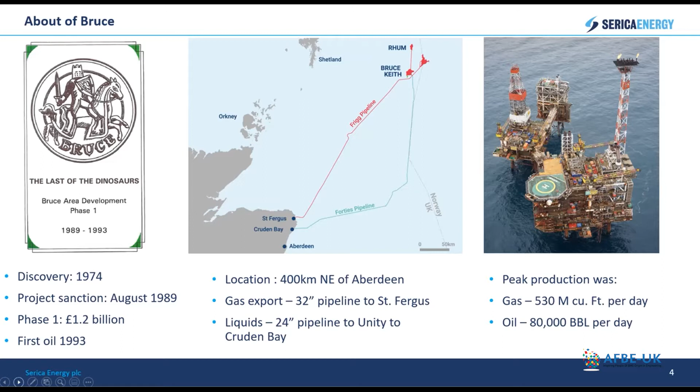You can see the drilling derrick towering there in the middle, and this is where well intervention is located. The CR, this is the compression platform. This was like phase 2 and came along later. This is the arrival point for the Rhum gas and the booster compression for Bruce gas. There is secondary helicopter access here for emergency use.

A couple of notes here. The PUQ jacket is in 121 meters of depth, and when it was lifted in place at the time, it was a world record for the heaviest jacket lift, which was 9,360 tons. The flare, you can see towering there as well. That was the world's highest at the time, which is 80 meters high.

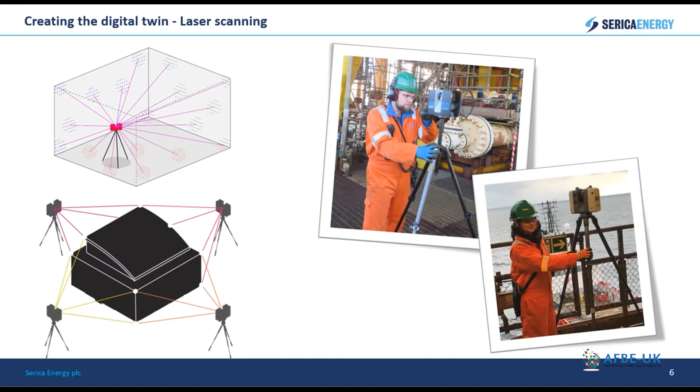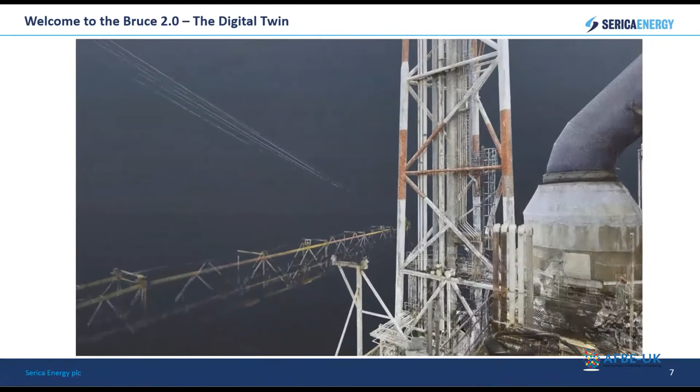So this is how it was done. We sent the company off, GDI offshore, to scan the asset with our laser scanning, and this is a fly through of the PUQ asset of the model when it's all integrated together. So this is landing on the heli deck. The PUQ is the largest of the 3 platforms of Bruce.

The process works by rapidly scanning an environment from a fixed location and then capturing all the minute detail from all the surfaces and the surrounding objects. This is all collected and images taken, and then it forms this 3D model that you see. It took around 40 days to scan the facility in full by one person, and they had about 6,000 different separate scan locations, and it took about 190 billion points of data.

So it looks good, but so yeah. So what do we do with it? You can see the 3 digital scans of the 3 jackets there, but the case for this digital twin was so we could have a tool that could be used every day by both onshore and offshore teams to aid communication. It was to encourage different ways of working, enhance our onshore planning capability, and also to reduce the need for site visits, for surveys, for example. And we wanted a different approach for visual inspection, with the aim of increasing work efficiency, so we could execute more work offshore, and to support our response to the COVID restrictions.

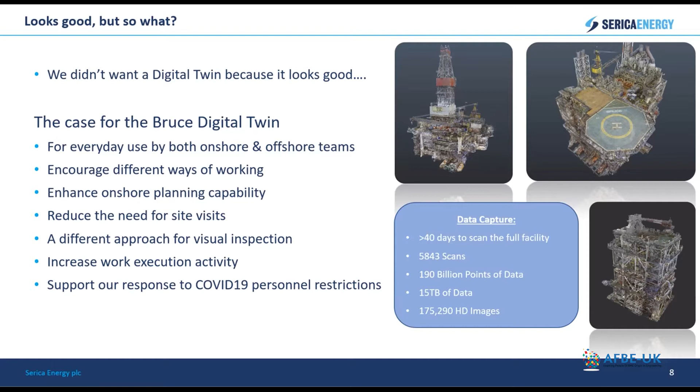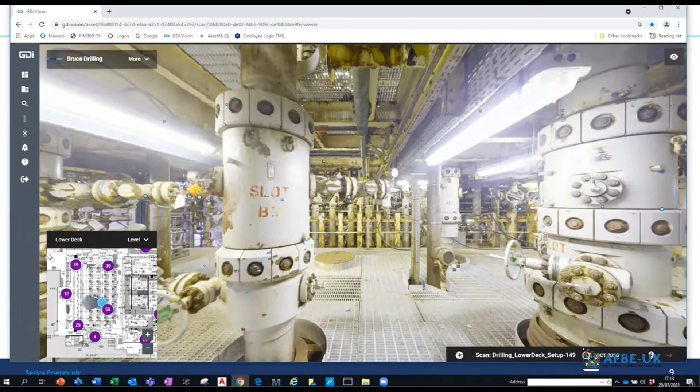Oh, it's taking a bit longer than usual. Okay, so when I go into a certain location, I save the bookmark to save time, and you can walk around and have a look. So these are all the wells, and you can zoom in, zoom out. You can go to these camera icons, and then that'll take you to the next data point.

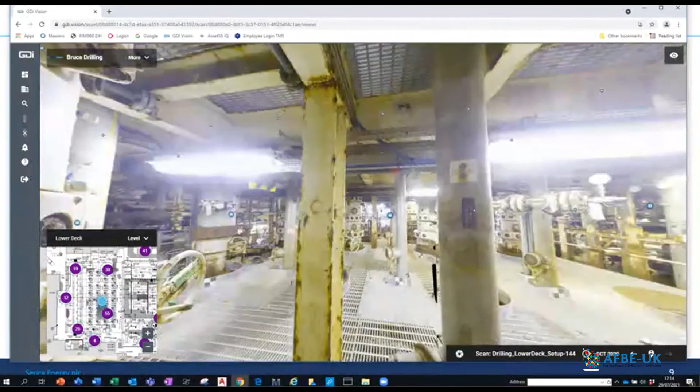Now, I mentioned around there was about 6,000 different data points. This is one of the data points here. This is where the tripod would have been sited and did the scan from. So it lets you move around 360 and just look around like that. You can zoom in quite far, zoom out. It's got the functionality to take measurements, which I'll demonstrate as well.

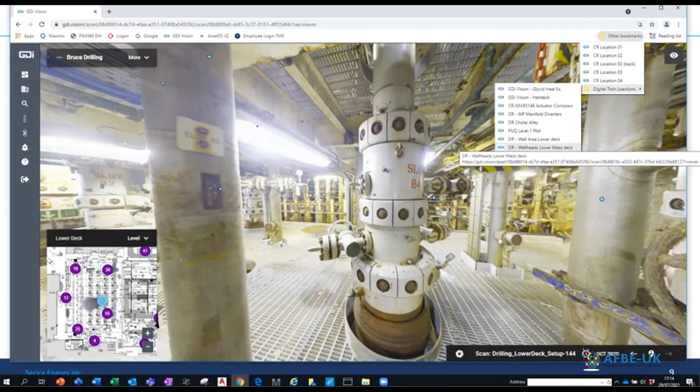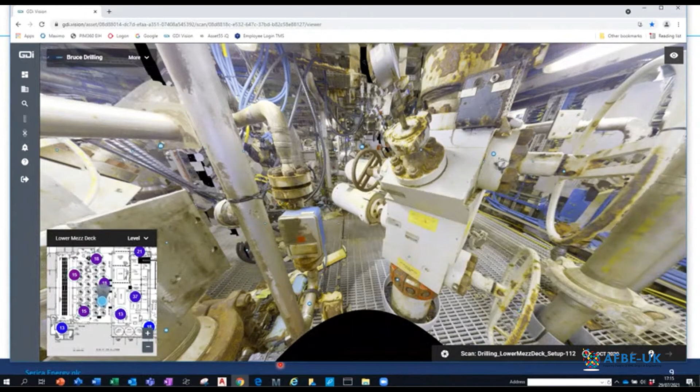Here's another area. So these are all the wellheads. Something that looked like just a little box on the overview I gave you all, it's quite complex - a lot of valves, a lot of pipes. So when somebody who's unfamiliar with the asset or new to oil and gas sees a schematic diagram, it looks fairly straightforward, but in reality it's quite different. That's what I'm trying to get across here.

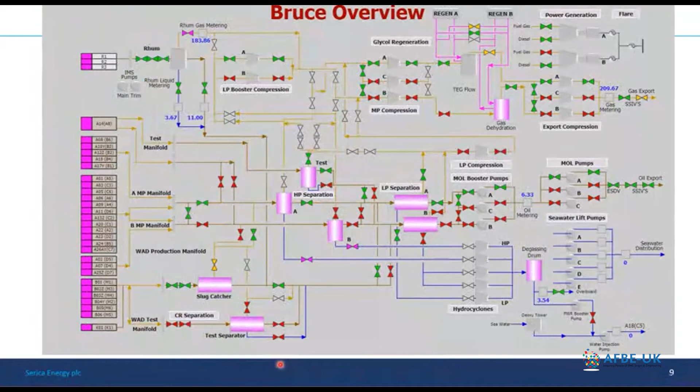The next slide here is just a couple of the points to go to. Helideck - so this is where you would arrive, come off of the chopper.

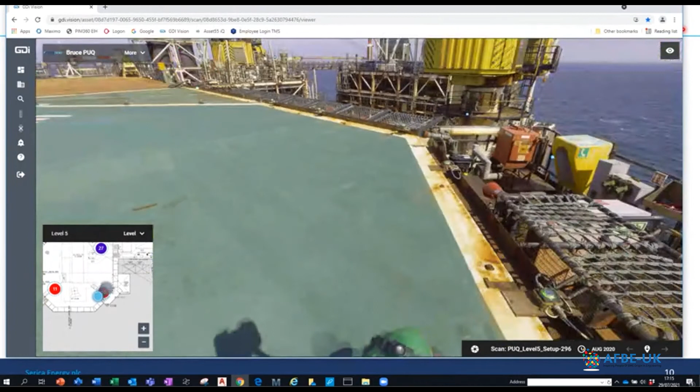And you can see the data point here, the shadow of the scanning tool. So you can go to the plot plan of the asset, pick a point of interest, or you can just use it like you do in Google Street View - just click on an icon, move to the next stage, and walk yourself through the platform. You can do this, just walk around. So that's around about the helideck and manifold area.

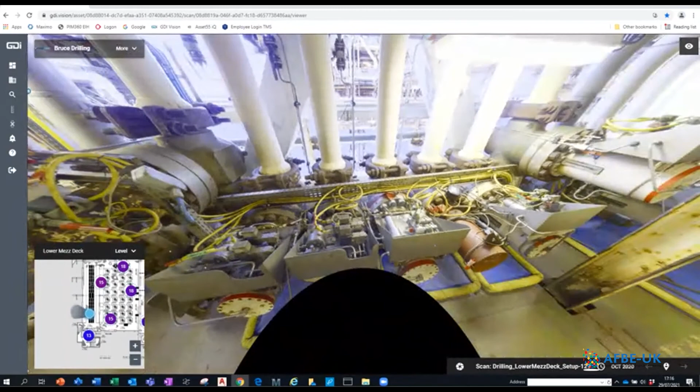So that loads up. Next. Just giving you a little look here - this is the manifold, and these are all the valves that are coming off of it. You can see that there's quite a lot going on.

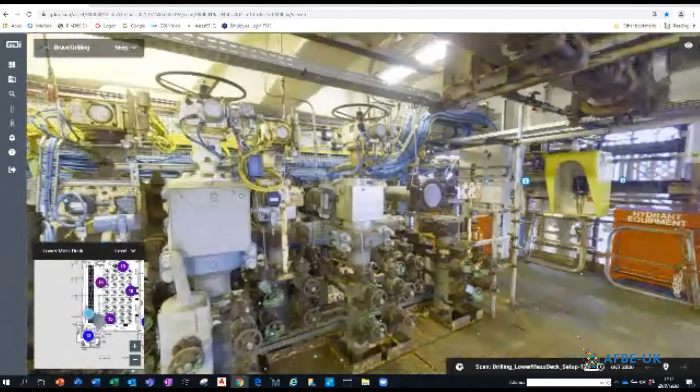These are all the choke valves. These are the valves that control the hydrocarbons when they come out the Christmas tree and reduce the flow rates and pressure down before it goes on to the separation.

One of the most obvious benefits that a dimensionally accurate digital twin brings is the ability to support rapid design and fabrication activities.

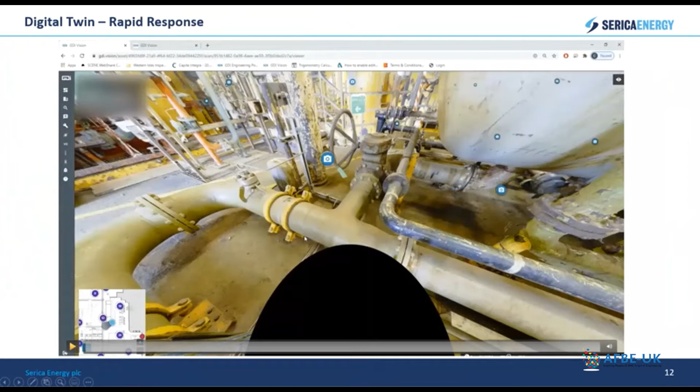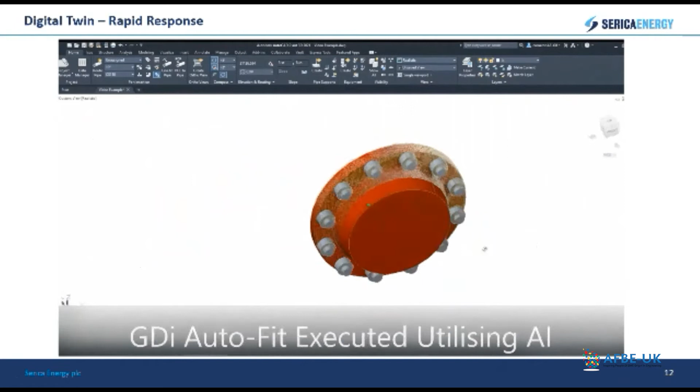So this is going to be a video demonstrating how the digital twin can be used to support a rapid response for replacement of a spool. This is the spool in GDi Vision, similar to what I just showed from my desktop. The point cloud data can be extracted and loaded up into AutoCAD, and they start generating the model. Some of this is through artificial intelligence. There's the flanges.

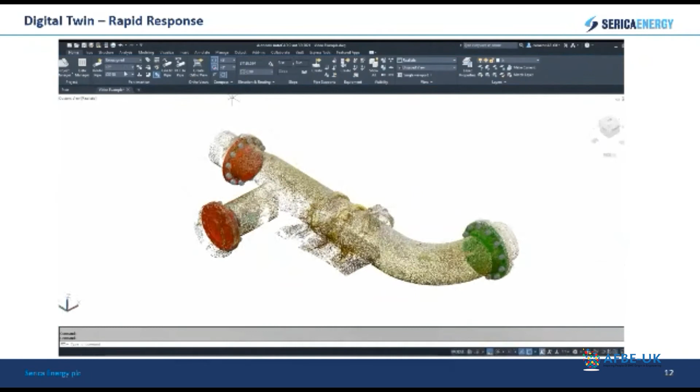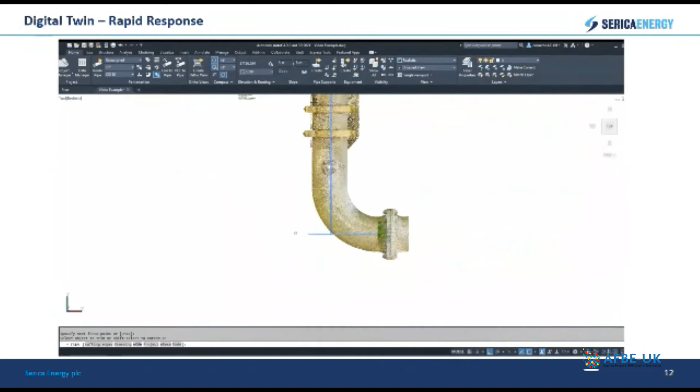Traditionally, if we were to do this, we would have to mobilize personnel and equipment offshore, and need the time to complete a scan, then time to process the data, and then create drawings for this. So with a millimeter accurate model of the asset in place, we can now rapidly respond and produce construction drawings and commence fabrication within hours, not days, in response to any emergent issues.

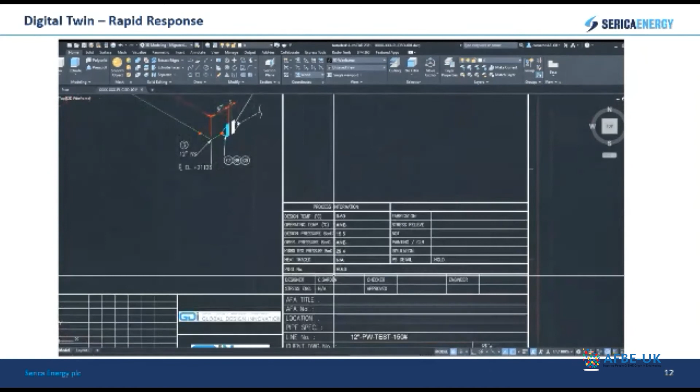It's not just for rapid repairs - the digital twin minimizes or can eliminate the need for surveys for routine repair orders and modifications. From the AutoCAD model, the GDI are able to produce a fabrication drawing, and we can send that to the fabricators to proceed with manufacture.

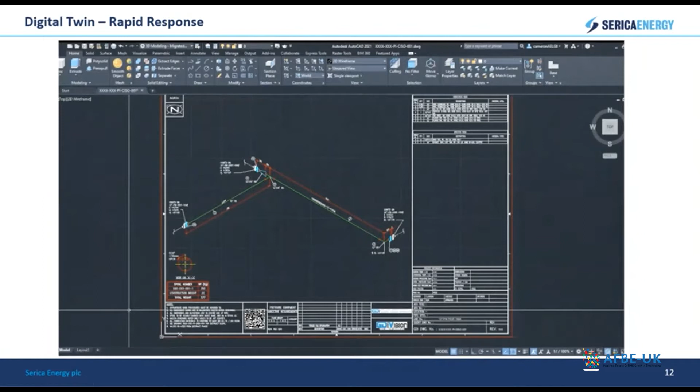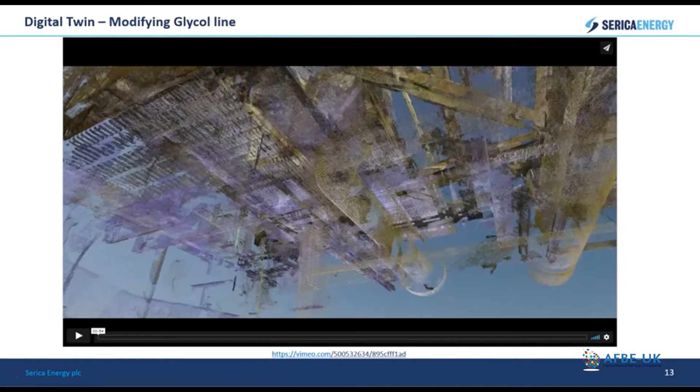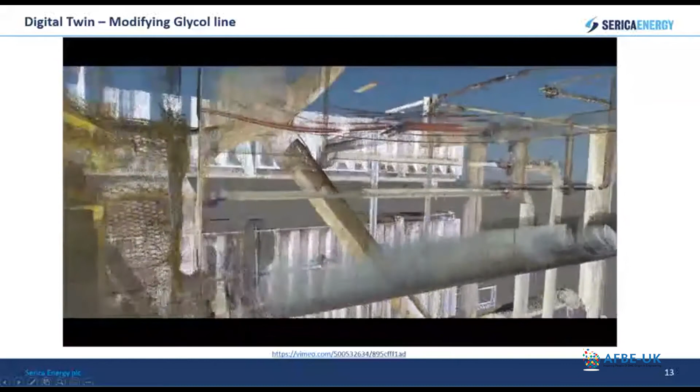So this next video shows how we can use it to understand and help plan complex replacements. This one was for a glycol line, and you'll see how complex this is. The tool has enabled us to plan and design modifications from the beach without the need to go offshore and survey. Just imagine how long this would take to go offshore and survey.

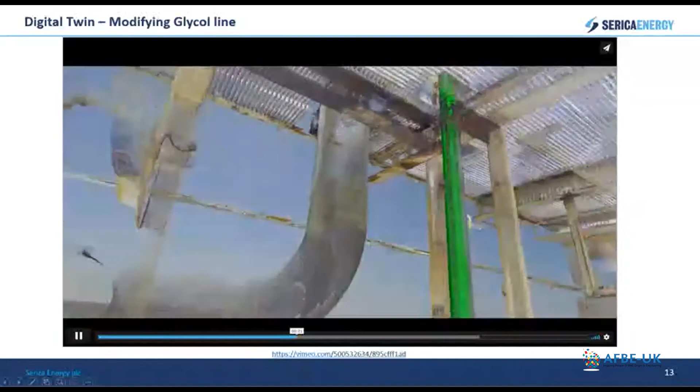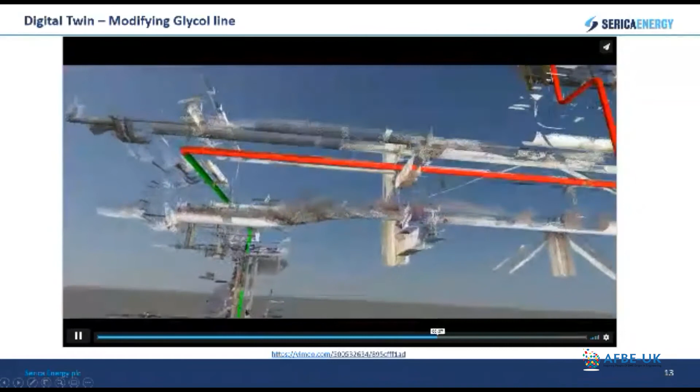So this is the line in question, highlighted in green. It goes down through a deck penetration, down another level, goes round down again - you can see the pipe supports here too, how it's supported. This is made up of numerous bits of pipe, lots of connections there, and there's another deck penetration. To go offshore and survey this would have been quite significant, and we were able to get this model pulled from the digital twin in no time at all.

So this digital twin is allowing a rapid response and modifications. It's allowing us to specify replacement pipework remotely without the need for surveys, or minimising how many surveys we need. It's allowing us to plan modifications from the beach, and it's allowing us to react faster and respond to issues as they arise.

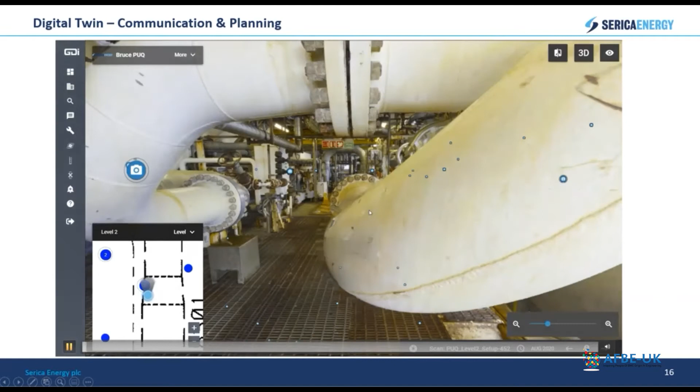So the next couple of slides is around communication and planning. So while this video plays, I will give a talk through.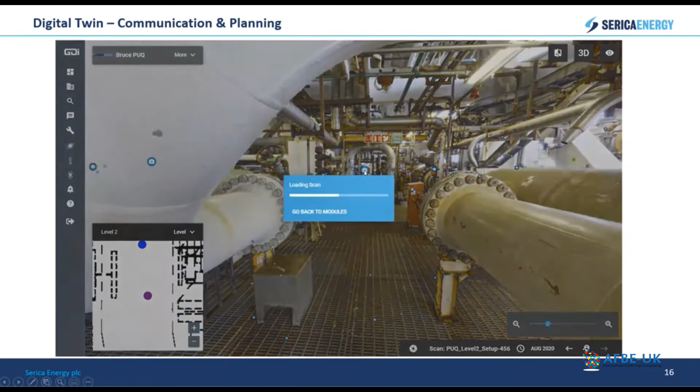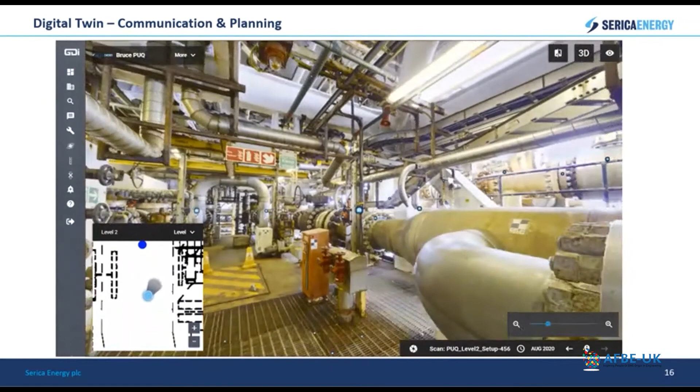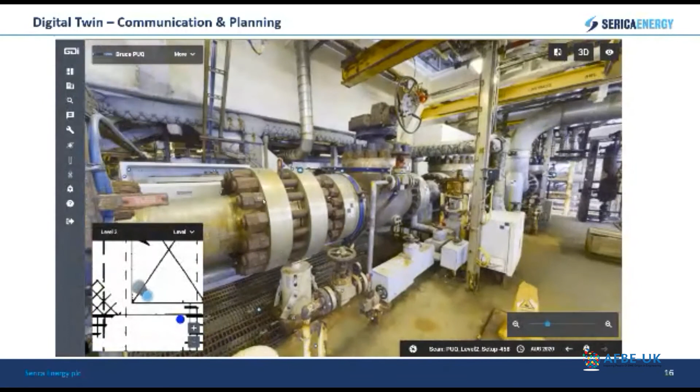It's been quite pleasing how the asset images have captured everything during the 3D survey, and it's become an everyday reference point and communication aid that's been embraced by the offshore and onshore teams. The supporting GDI Vision software allows users to access a scan location and navigate through the facility and points of interest. In its most basic sense, it offers a remote asset familiarization capability for those who have never been on the Bruce asset.

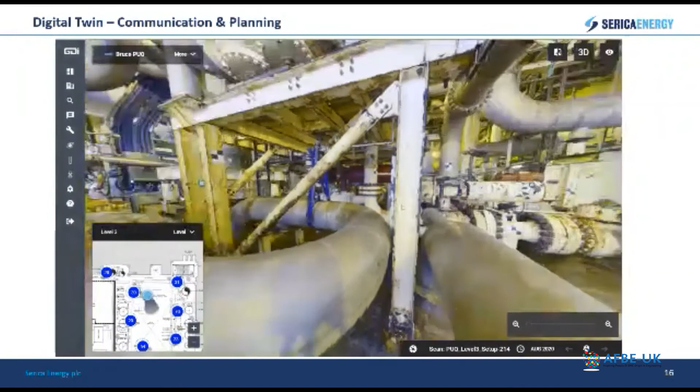So this is really useful for first-time visitors who've never been there, for familiarization.

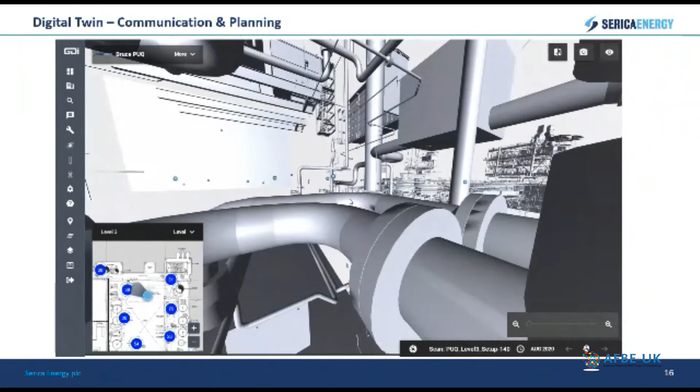And what you're seeing here just now, this is a 3D model, a different database that was produced in the early years of the asset, and this database has been able to be incorporated into the model. So you can integrate other databases into the GDI software, which we're still realizing the benefits of.

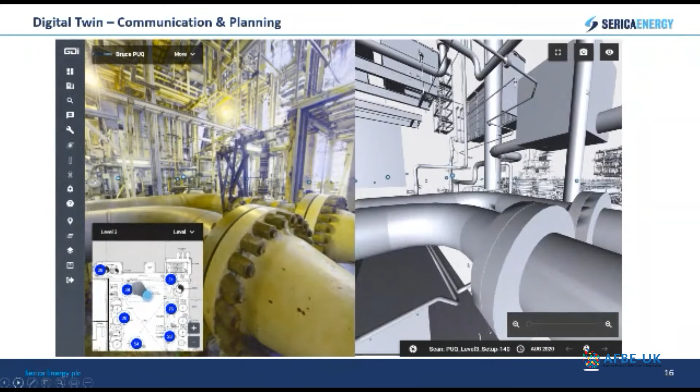So yeah, it really minimizes the time needed to do a survey. It's helping us to plan jobs. Before people even mobilize to the asset, we can give them a walk around, show them the locations, the points of interest, and it's been helping us get some queries addressed before we even get there.

When I used to go offshore and do surveys for various scopes, sometimes I just got told my check-in details and had to go offshore, and you'd find out when you got there. It would have been so useful to have had this at the time to familiarise yourself and start preparing. It would have been a lot more effective.

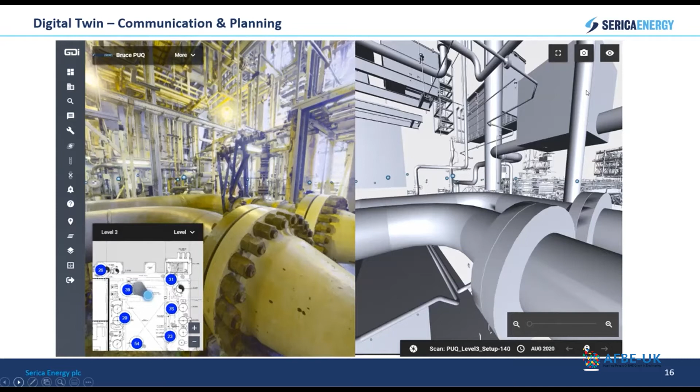So that's within the GDI software. It does enable you to tag equipment and add comments and defects. So we've started using this now for equipment identification and defect tagging.

So when planning a repair, the location can be identified in the model, measurements are taken, and the work estimated and prepared. The dynamic links within the GDI software enable the navigation to correspond with a corresponding work order in Maximo, which is what we use for our maintenance management.

But also, it talks to other databases we use as well. So with components and defects now tagged and identified in the digital twin, direct navigation is enabled between the model, our maintenance software, which is Maximo, and our information management database, which is called PIM 360. So we can get access to pull up the data sheets, drawings, P&IDs, just by clicking on the tags that we put into the GDI model.

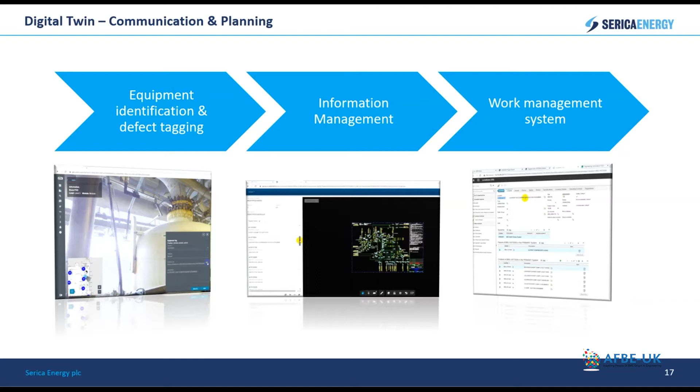And this has been really beneficial for my space, just in saving time. Once somebody's got it tagged up in there, you can access it again very quickly. So yeah, the digital twin is enabling us remote learning and familiarization, both internally and externally.

So currently, I'm starting to use this tool for most of the work scopes that I've been involved with now. When we're planning a work scope, I use this to go in and look around and see the bigger picture, and not having to rely on individual photos, which we used to do.

So we can talk to the planning team offshore, focus in on particular areas, and then ask them to go and specify some specific actions for them by using this tool.

I use this tool now for troubleshooting for various pieces of equipment, plan and replacement, valves, coolers, exchangers. We use it for helping with risk assessments.

We use it for our management of change process, for assessing plant changes, doing our risk barrier reviews, and we also use it for verification of data and the condition of equipment at a point in time.

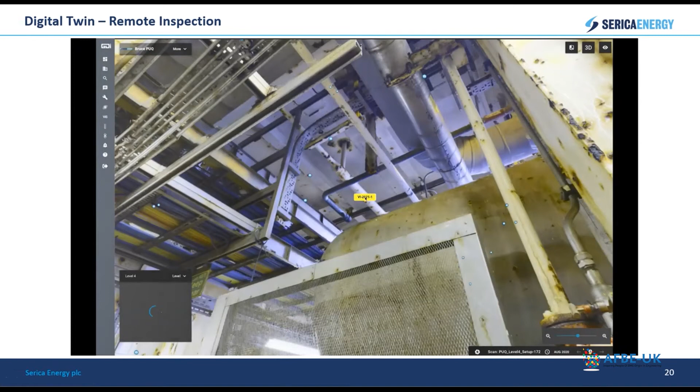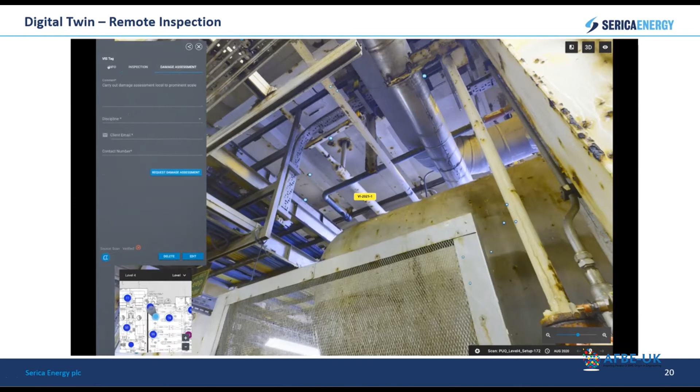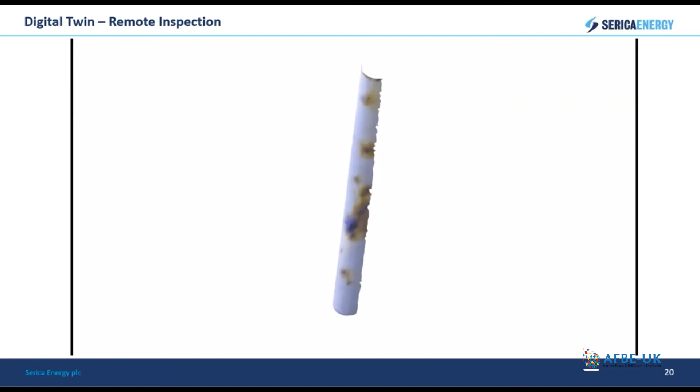And when concerns are identified, the offshore inspection teams are being directed to complete a more focused site inspection. This is very much a complementary inspection technique that we're using, and we're not removing personnel or reducing our inspection team presence offshore. We're just using this to support and complement and hopefully be more efficient in our inspections.

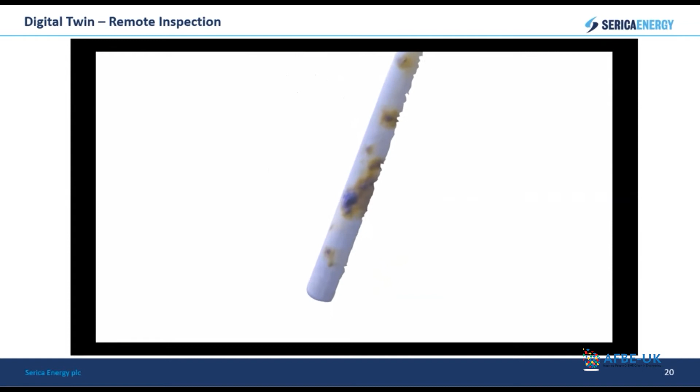It is acknowledged that the data is only 100% accurate on the day that it was captured. And our strategy will be to periodically repeat the laser scans to update and refresh the data throughout the remaining asset life.

And this is being integrated into our management of change process. When we do change pieces of plant, we'll have them marked, earmarked for going and prioritising a data scan in that area to reflect the change.

So through the adoption of this complementary inspection approach, we are projecting an increase in both the speed and the quantity of the inspection we will be able to achieve.

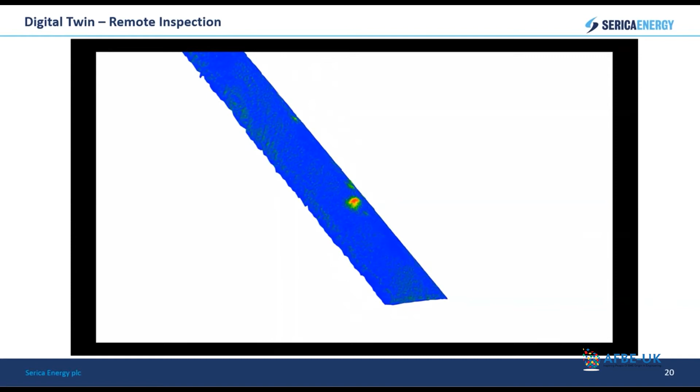Here's a case study that we've done regarding pipe deck penetrations. Traditionally, the challenge was to create a register of all the deck seals, to be concerned with the condition of them.

Traditionally, this would have been a register built by the offshore inspection team, with around 3,000 locations. It's quite a time-consuming process to go around and identify all of these, then compile reports, update the register, and send it onshore for a data review.

So the digital twin enabled us to complete a desktop inspection and data review. The locations and registers were all populated in the digital twin, and it's fully auditable.

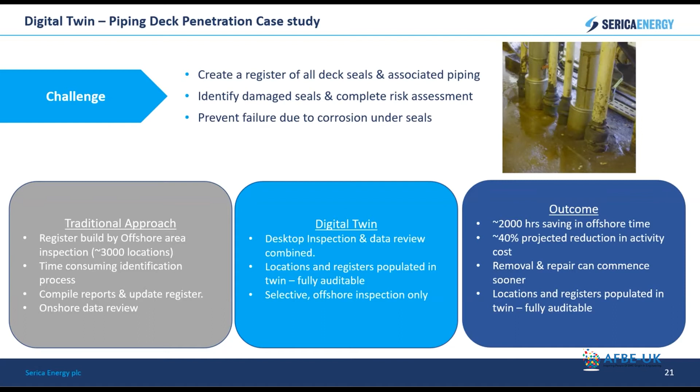We've been able to give selective offshore inspection scopes. We've realised around a 2,000 hour saving in offshore time, about a 40% projected reduction in activity cost, and it means we've been able to remove defects sooner and repair them sooner.

So yeah, the locations and the registers are all populated in the twin, and they are fully auditable.

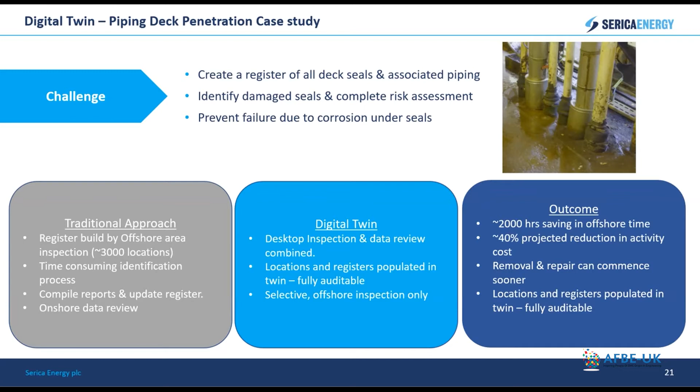So to recap on some of the benefits I've talked on so far: we've got this remote learning ability for asset familiarization. It's an effective communication tool and a visual common point of reference.

We're seeing efficiency gains from the enhancements of our onshore planning capability and integration of our software platforms, such as Maximo. It's given an ability to rapidly respond to emergent issues and efficiently plan routine repair and maintenance scopes. It's a new approach to inspection and a complementary technique that will increase the quantity of inspections we are able to achieve.

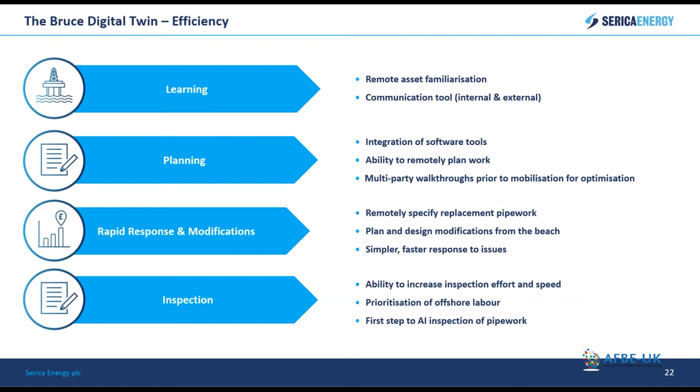So some of the efficiencies here: it's providing efficiency for us, continuing to drive efficiencies by adopting the technology and changing our behaviours from how we would have traditionally planned work. It's maximising our onshore planning and work preparation, which proved really useful for the first TAR that Serica completed just in June this year.

It's also helping us prioritise our offshore labour. It's supporting us in our response to COVID, because due to our reduced POB, it's allowing us to do various preparations and engineering tasks onshore without the need to send people offshore.

I would have traditionally went offshore maybe 4 times per year, and because of the COVID restrictions, it hasn't enabled me to do that. But using the digital twin, it's enabling me to still progress with the planning of some of the scopes that I've got in hand.

One of the recent successes we had was our wellhead maintenance campaign. Our wellhead interventions engineer had never been on the Bruce asset, so he was able to plan and execute the wellhead maintenance campaign with the use of this tool.

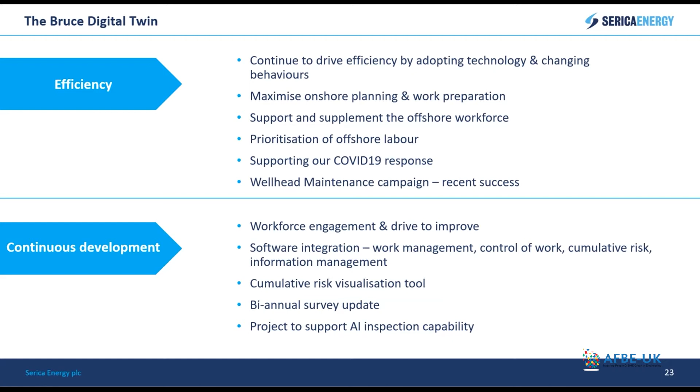So, watching the time there, doing not too bad. For the last few minutes, I just wanted to show a couple of things.

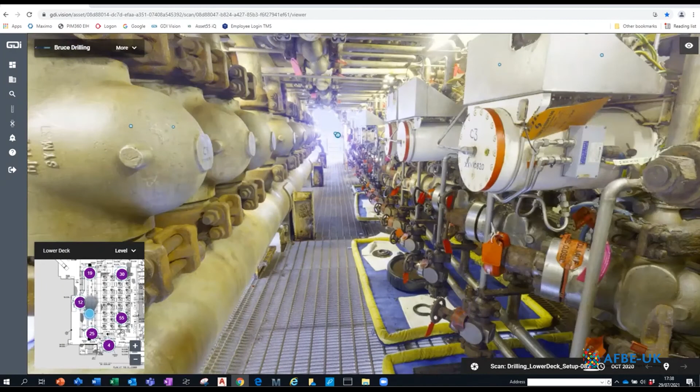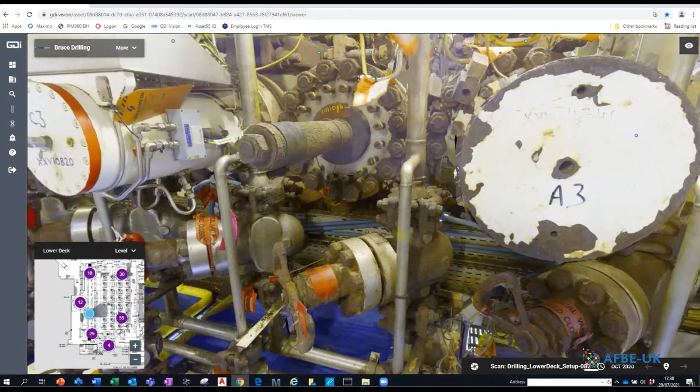So if I go here, this is an area where there's a lot of valves. There's been various programs for upgrading these valves, and you can see it's quite congested. All these cylinders are the actuators for the valves, coming off of the manifolds. This one has been removed, it's decommissioned. These ones are nice and bright and white, quite recent.

So I'm using this tool to quickly identify which valves are out of use, and some that are an older design. I know these are an older design from discussions with the manufacturer - this end plate is welded on. This is the newer design, with all cap screws. So just by using this tool and walking up and down this area, I'm able to start populating a register on the condition of these valves and planning the way forward.

This is another scope that we're in the stages of planning. This is a glycol heat exchanger, a heavy piece of equipment - it weighs about 10 tons - and it's started to weep slightly.

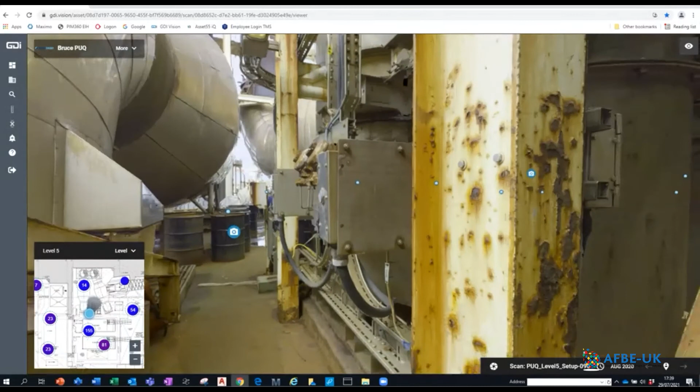So this is it here, this box you can see. These are all the bolts there, and you can see the little arrows - this is an indication of where we're starting to see a leak, a seep. We're seeing a drip every couple of minutes, so we're planning on changing this piece of kit out.

When you zoom out here, you can see the bigger picture and just how complex and difficult it is to take this 10-ton piece of equipment out of this package. You can actually click in here and see a bit more.

So you're starting to see the flange connections here. Just see how congested it is - there's lagging to be removed, and all of the destruct work that needs to be done to get access to get this out.

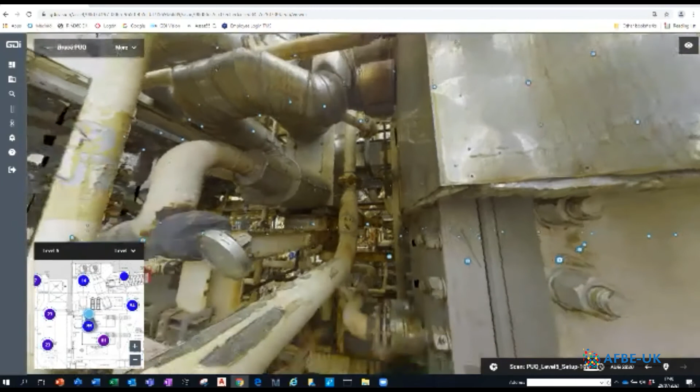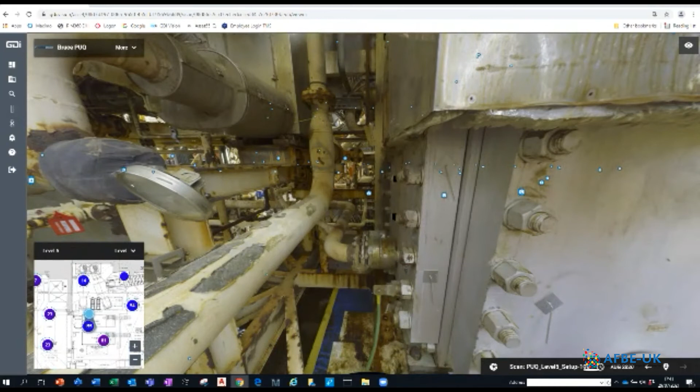It's going to be a complex job, and using this tool has been so useful for me, certainly because I can't visit the asset due to the reduced allowable personnel on board. But I've been using this tool with the planners and the lifting engineers to plan this.

So, one thing I haven't talked about yet is the measuring tool. It's really millimeter accurate, so you can use this tool for taking some measurements.

That's just me taking that bit there. What's really clever is, if we put it on that bolt head, for example, and measure it to just the edge of that little bracket, and move it just a few clicks along - this is touching the exchanger on the back - you can see how it just changes from like 8 centimeters to 45 centimeters.

I was a bit skeptical of using this to start with for checking various things. I use it for verifying work orders - for example, checking a face-to-face dimension of a valve, or if we're replacing valve actuators, which are a different design and usually different sizes. I can use this tool to verify that what we're buying, what's been proposed, is going to fit, or highlight any issues, as the case may be.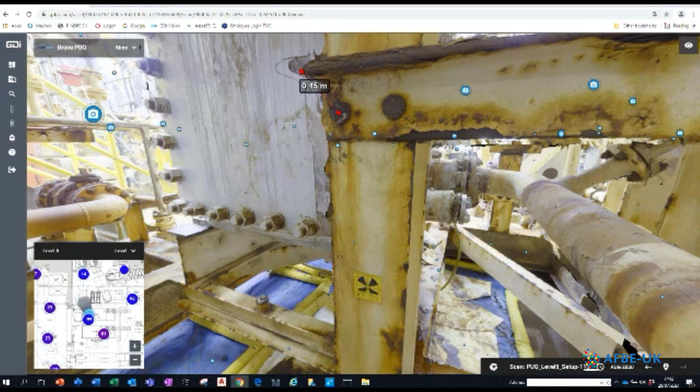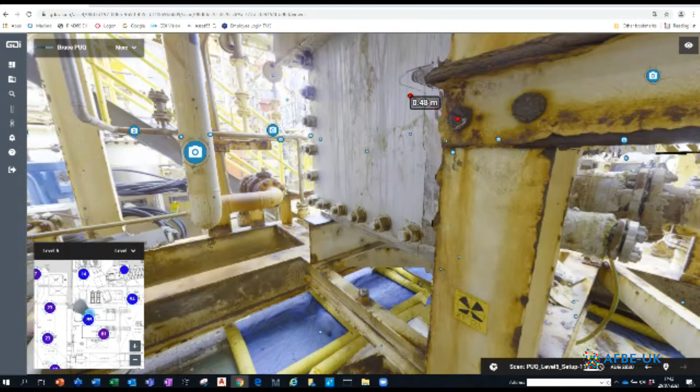So this measuring tool is something I use quite often, even for checking how congested something is - are we able to remove this actuator from a valve? Can we take this bit of pipe out easily? It's helping us flag concerns early on instead of waiting to execute the work and realizing we've got a problem while we're actually carrying it out.

Just got a couple of minutes left. This is another job that we're working on.

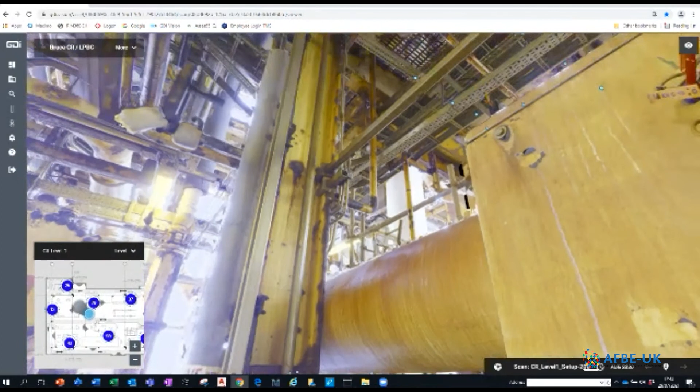It's proven difficult to get the vendor offshore to survey this. This line's here - these are utility points, seawater utility points - and the problem is all the lines are welded together. It's duplex pipework, and the valve conditions are deteriorating. The bolts are corroding, and it's a risk.

And the isolation valves further back are defective and can't provide a suitable isolation. So we're proposing to do a sort of pipe freeze on all of these points. This tool's enabled us to go pick all the locations and see, like, run a pipe, see what we need - is it possible to get the pipe freezing equipment on there, and where's the best spot to site it?

So this one isn't too bad, but some of the others are quite different. So I've been using this tool with our third parties to show them the job at hand.

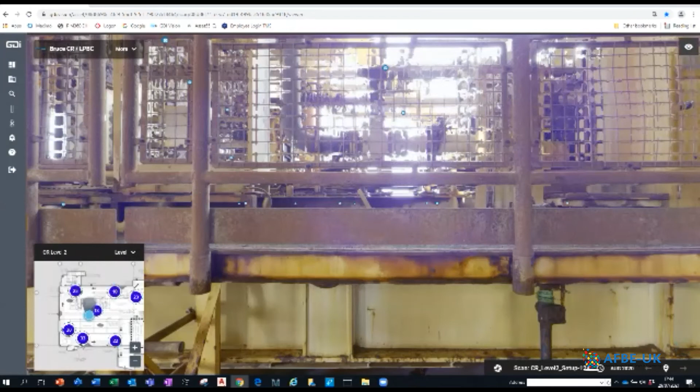Yeah, you can see this one here. So this pipe, this is a bit different, it's a bit more difficult. There isn't the same room here between the pipe and this support.

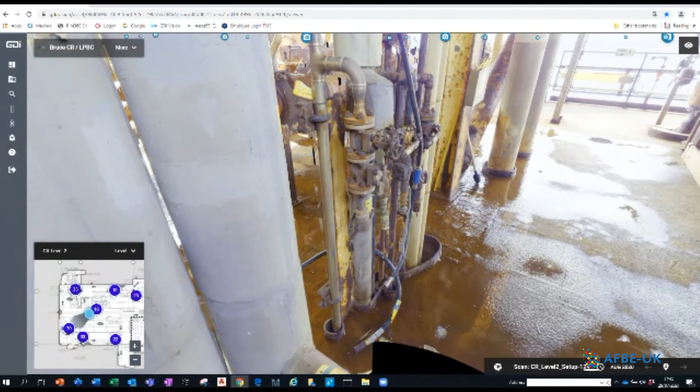So it's been a really useful tool for this project that we're planning - getting the materials and where we're going to site all of the pipe freezes to complete an isolation.